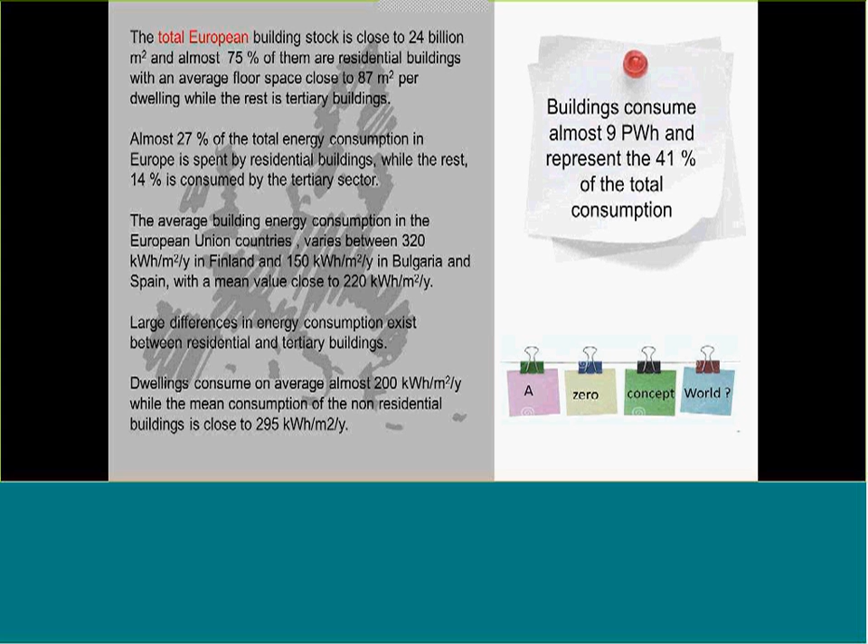As it concerns the evolution of the energy consumption in Europe, the tertiary sector is unfortunately presenting a continuous increase of the consumption during the last 30 years. The increase rate is of the order of magnitude of 1%, 1.1% per year.

And this is mainly because of the very rapid increase and evolution of the services sector in the tertiary buildings, and especially this evolution of the services sector is of the order of magnitude 1.5, 1.3% per year. And it is calculated that about 93% of the additional energy to be consumed in the tertiary buildings is because of the services sector.

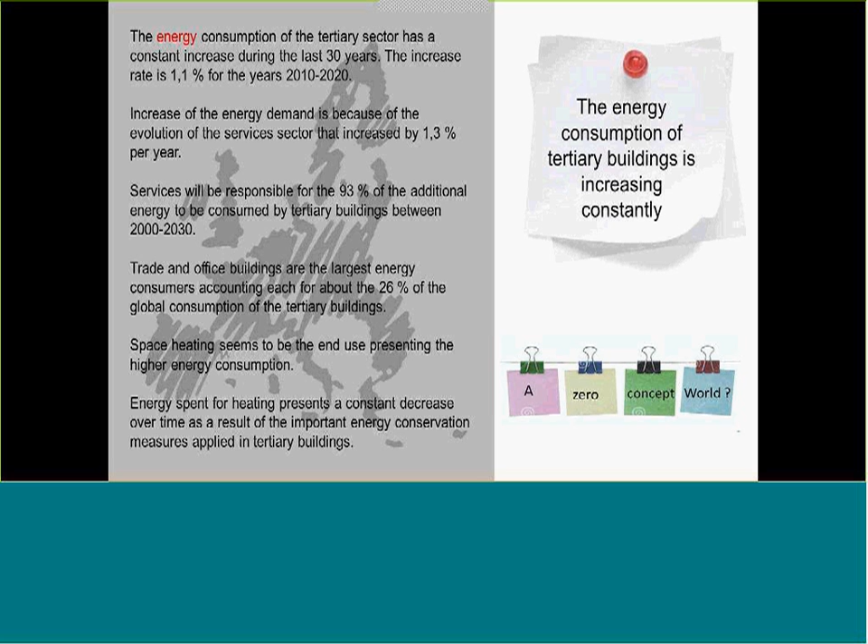And space heating seems to be the more important of the energy consumption components, but we have to accept that the energy consumption for space heating is decreasing during the very last years.

As it concerns the residential sector, and despite the very important legislative framework that has been developed during the very last years, and the significant improvement of the energy efficiency, which is of the order of magnitude of 1.4% per year, unfortunately, the energy consumption of the residential sector in Europe has increased by 14% between 1990 and 2012. And this is because 60% of the increase is due to the increase of the electricity consumption because of the additional use of air conditioning, cooling, electronic appliances and devices.

And also we have to consider, and it is very important, that the increase of the energy consumption in the residential sector is not only a technical problem, but is very strongly interrelated with other economic, social, political, and technical reasons, which really are very much associated with the final energy consumption. I will go through that and explain to you.

On the other hand, although the energy consumption for the residential buildings and the tertiary buildings has unfortunately increased during the very last years, we have a very specific decrease of the heating energy consumption of about 15% during the period 1997 to 2009. And this is because we have a very significant legislative framework, but also we have new technologies that help to decrease the energy consumption for heating purposes, and also new dwellings really present much lower energy consumption than in the previous years.

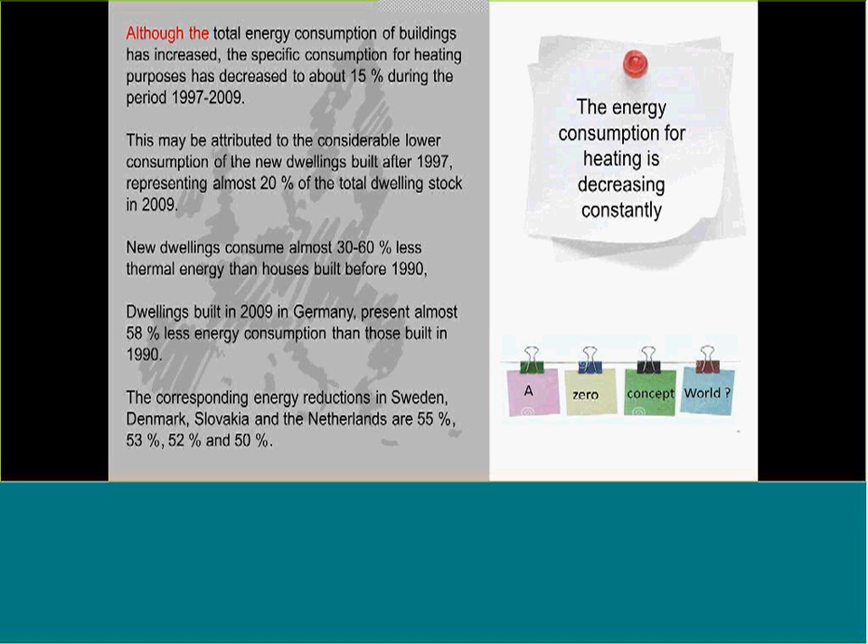And in most of the countries where heating is the major energy consumption component, the energy consumption for heating purposes has been decreased by 50 or 60%. So we might say that we are very successful as it concerns the heating energy consumption.

Also, we know very well in Europe that space heating is the most energy-consuming component for the building sector, representing almost 71% of the total consumption. The second one is water heating, 12%, cooking 4%, while unfortunately the data we have combines lighting, air conditioning, and other appliances together, so we don't have specific information about the energy consumption of air conditioning, nor can we calculate it. Altogether, lighting, air conditioning, and appliances represent almost 15%.

Although this 15% may be considered as low, in reality the energy consumption for cooling is increasing very, very rapidly. Especially in the southern European countries, this energy consumption for cooling purposes is considerably high. For example, in Cyprus it is something close to 670 kilowatt hours per year, while Malta is close to 540 kilowatt hours per year. And although we have very important increasing rates in most of the southern European countries, similar results are also given from the northern European countries, where there is also a very rapid penetration of air conditioning.

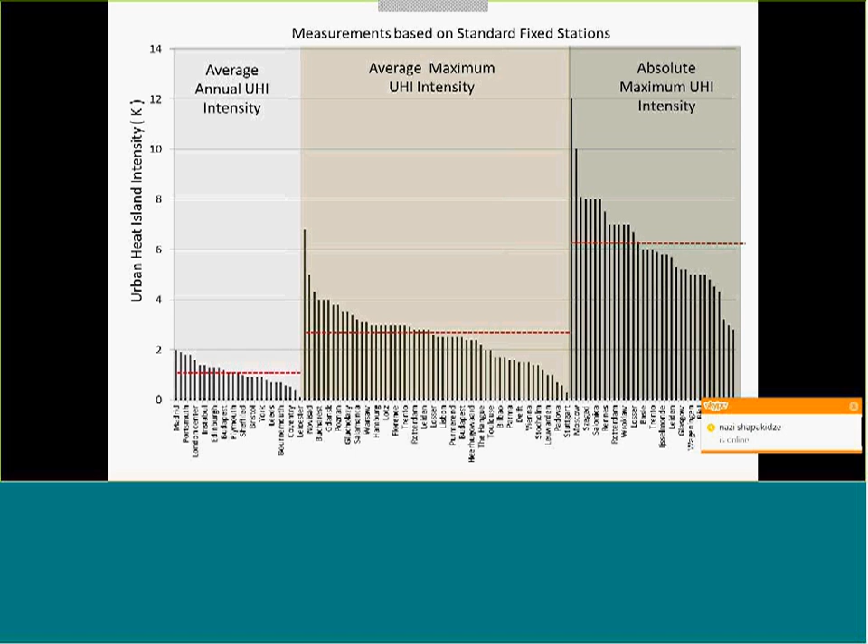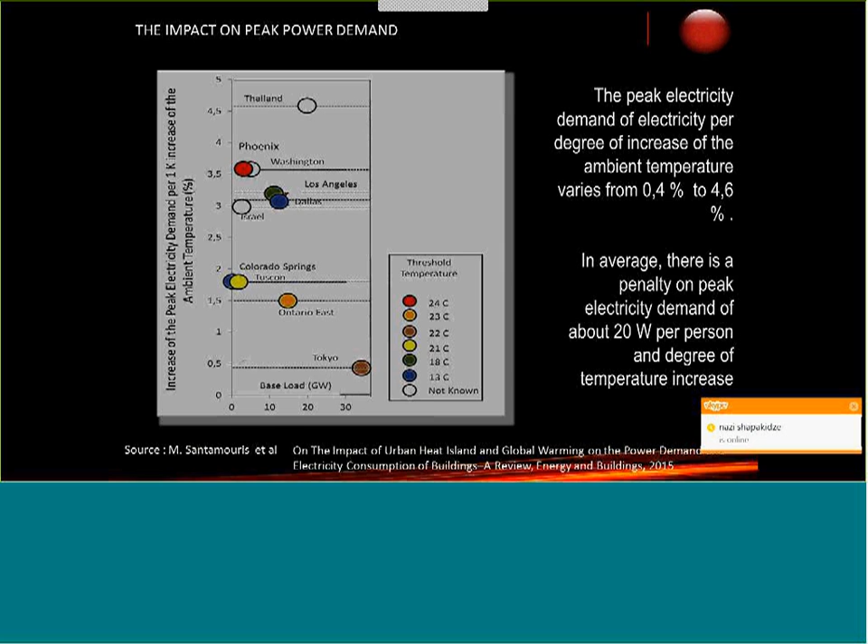This is the more documented phenomenon of climatic change, and this has a very important impact on energy consumption. Recently there is a lot of information trying to assess the energy penalty or cooling penalty because of climatic change. We have seen that the peak electricity demand is increasing between 0.4% to 4.6% per degree of temperature increase. On average, the penalty of peak electricity demand for cooling is about 20 watts per person and degree of temperature increase, which is a huge increase in energy consumption because of climatic change.

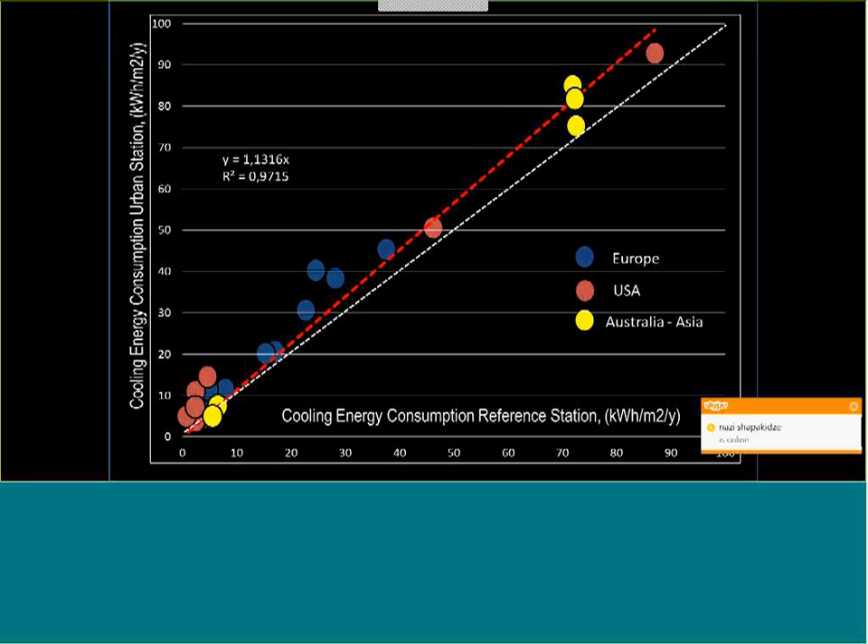On the other hand, very recent publications have shown that the cooling energy consumption in the center of cities all around Europe is increasing by about 13% on average. In some cases we may have a much higher energy penalty or cooling penalty because of the temperature increase. Other studies have shown that the global energy penalty per unit of city surface and per degree of local climatic change is of the order of magnitude of about 0.8 kilowatt-hours per square meter and degree of temperature increase, which is very high, while the penalty per person is of the order of magnitude of 68 kilowatt-hours per person and degree.

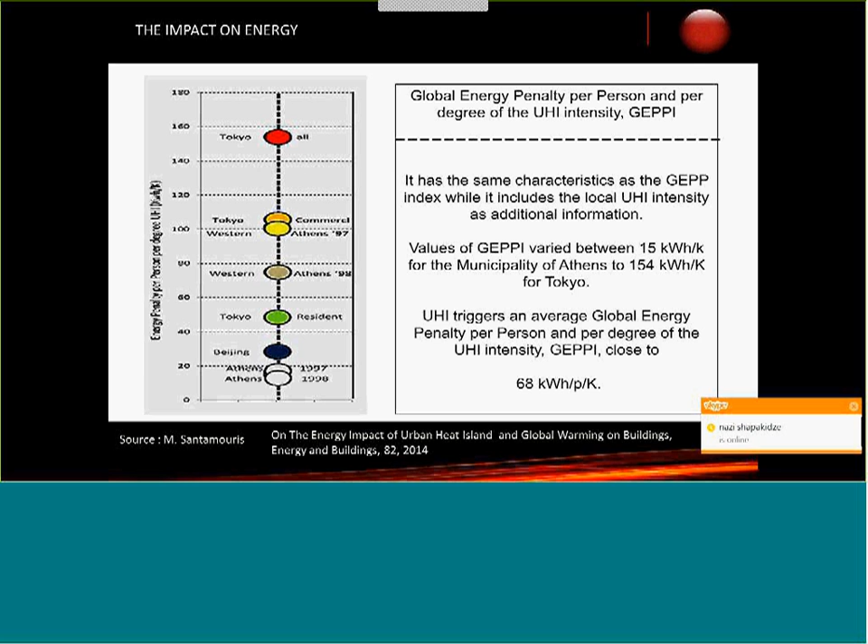So one of the major reasons that increases energy consumption for cooling in our countries has to do with local climatic change. When we examine future climatic scenarios, it is evident that if proper actions are not taken to reduce global climatic change, we expect, according to the IPCC, that energy consumption for cooling will increase by the order of magnitude of 800 to 1,000% during the next 50 to 100 years. We hope not to have such a scenario.

On the other hand, it has to be very clear that cooling is very much associated with health problems. According to a very recent European study carried out in about 30 different cities around the continent, it has shown that the mortality rate in southern European countries is increasing almost exponentially above 30 degrees. For northern European countries, the increase of mortality occurs at temperatures above 23 degrees. This is very important and has a tremendous cost on the health systems of our countries.

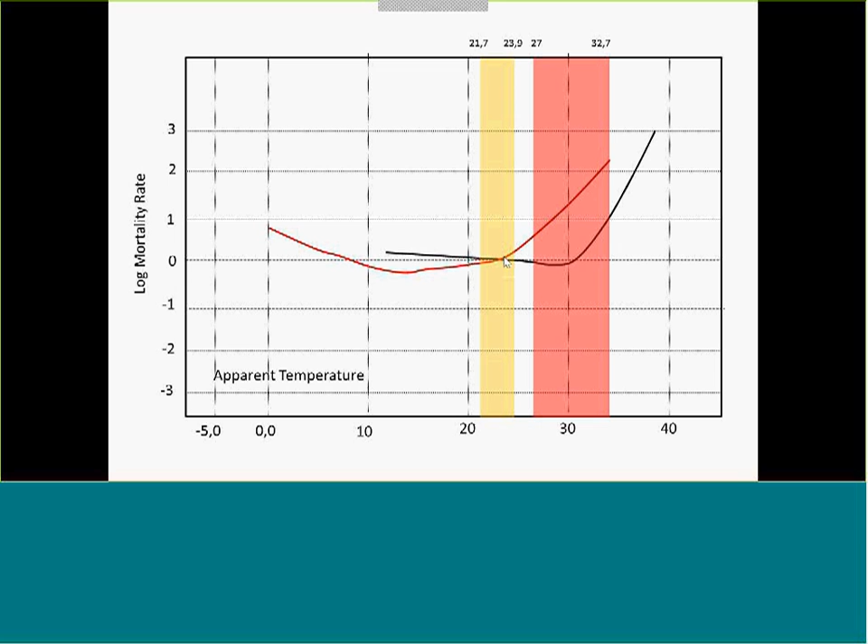A very recent study by the British health system has shown that for every euro invested in energy retrofitting for cooling purposes, almost 40% of this investment returns back because of the health benefits.

The third problem we are facing is very much associated with overheating of our buildings, and also of cooling—it has to do with the so-called energy poverty, which is a very important threat for Europe. Many people never worked on this, or are not aware of the real problem. They don't know that officially in Europe we have 150 million Europeans who are not able to pay bills.

This means 150 million people cannot really face the problem of energy during winter, or mainly during the summer period in the south, maintaining comfortable standards. This has a tremendous impact on quality of life and affects indoor comfort, social entertainment, health, etc. Monitoring of indoor comfort during heat waves in different European countries, especially for energy poor people, has shown that indoor temperature may be more than 35 average, maybe 35, 36 degrees or even more, with spells of more than 400 continuous hours above 32, 33 degrees.

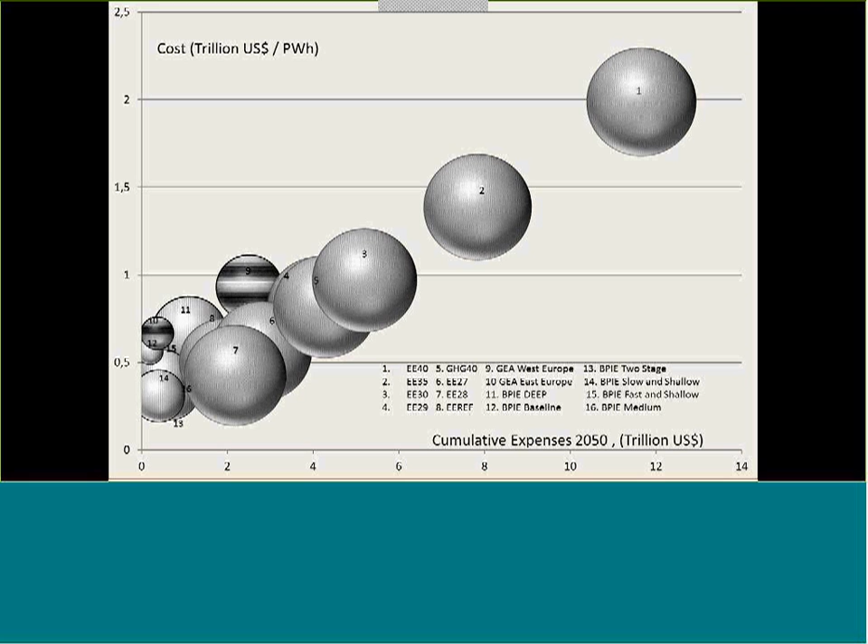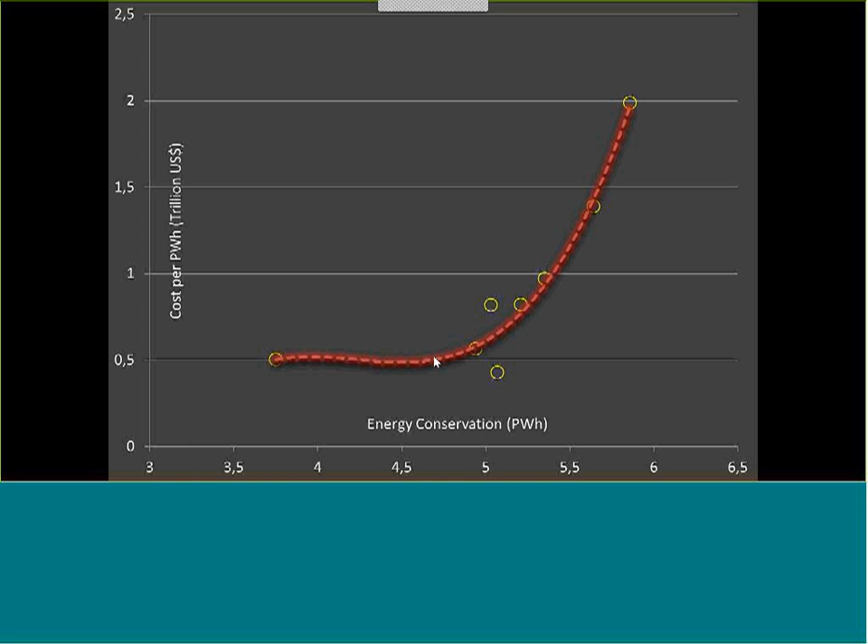What is more important, and must be well understood, is that the cost of energy conservation is not the same—it has almost an exponential figure and shape. For some technologies, the cost per petawatt hour is quite low, and these are the mature technologies, while if we want to decrease energy consumption up to 70 or 75%, as foreseen by the European Union, the cost of the technologies at the upper part of the curve becomes extremely high. We have to understand that cooling technologies are in the lower part of this curve, and this is the very helpful part of the whole situation.

How can we really decrease the energy consumption for cooling in our buildings? Of course, we have to increase the global energy efficiency of the building energy systems. Second, we have to substitute part of the load through clean and renewable energy technologies. But most important is the management of the energy and environmental systems of the buildings through the use of smart and intelligent technologies.

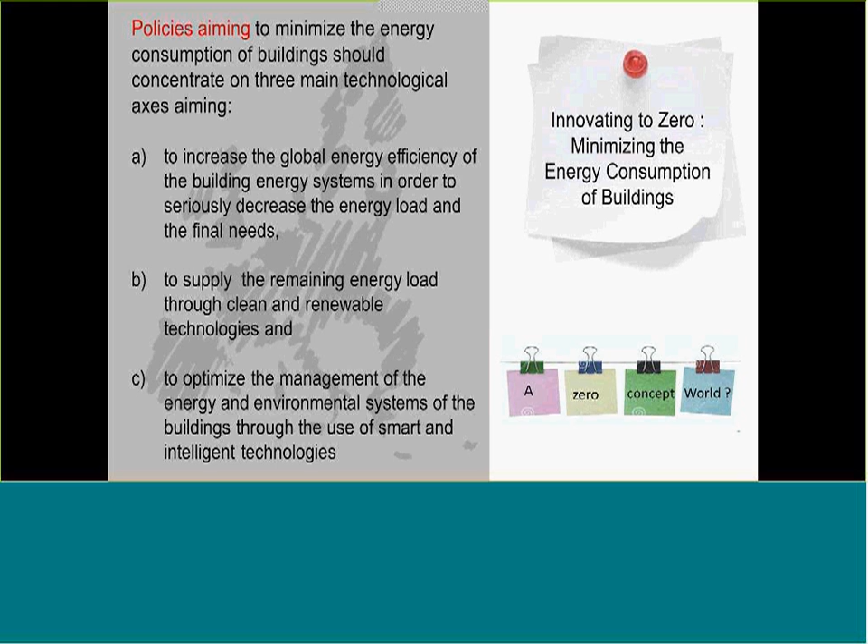Especially the use of smart products in the envelope—for example, natural and hybrid ventilation components, cool coatings—are extremely attractive. Also the use of high-performance heating, ventilation, and air conditioning systems is a huge market, with tremendous research. The order of magnitude of the market is close to 162 billion euros per year, and presents a growing rate in Europe of the order of magnitude of 10.5% per year.

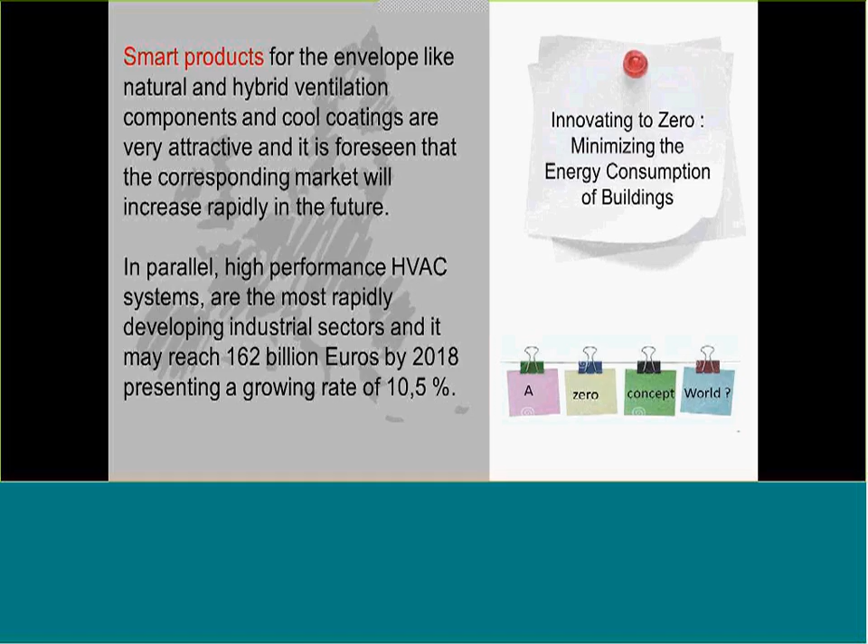On the other hand, if we really like to decrease the impact of global and local climatic change, we have to adopt mitigation technologies. These are very much associated with the use of component technologies for the roofs, for the city, etc. There's a recent study that has evaluated the total investment per person needed to minimize local climatic change in Europe, in order to avoid the temperature increase.

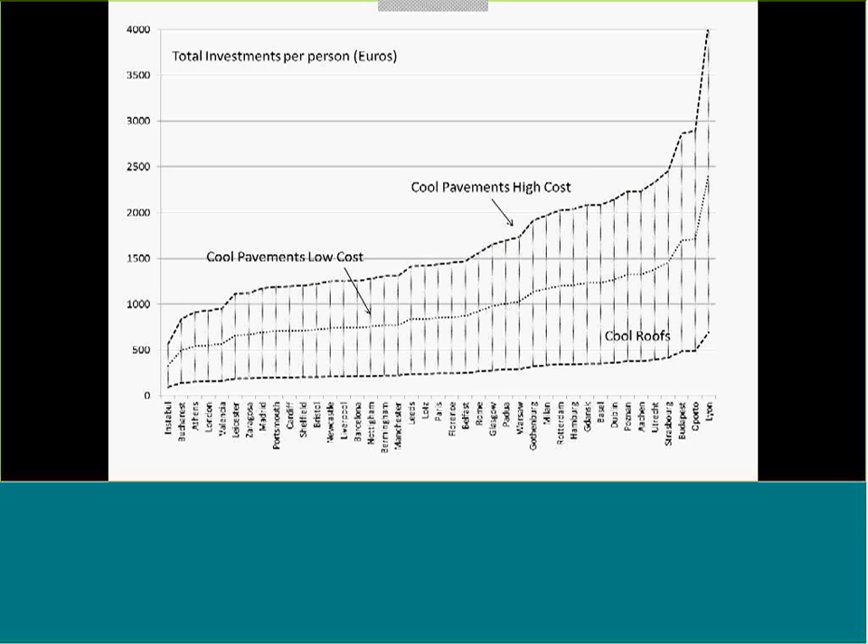For the different cities of Europe, the investment that has to be spent, the maximum to avoid the problem, is no more than 4,000 euros per person absolute maximum, while the average cost is of the order of about 1,000 euros per person. So by investing 1,000 euros per person in our cities, we can really mitigate the problem of local climatic change and avoid the problem of overheating.

On the other hand, in order to offer additional comfort to the 150 million energy poor in Europe, and avoid increased mortality and deteriorated comfort, recent studies have calculated the cost that has to be paid in Europe to retrofit all buildings of the energy poor. The absolute maximum cost is no more than 2.5 trillion by 2050, while the average is about 1 trillion. So this is the cost if we really like to improve the energy efficiency of our buildings.

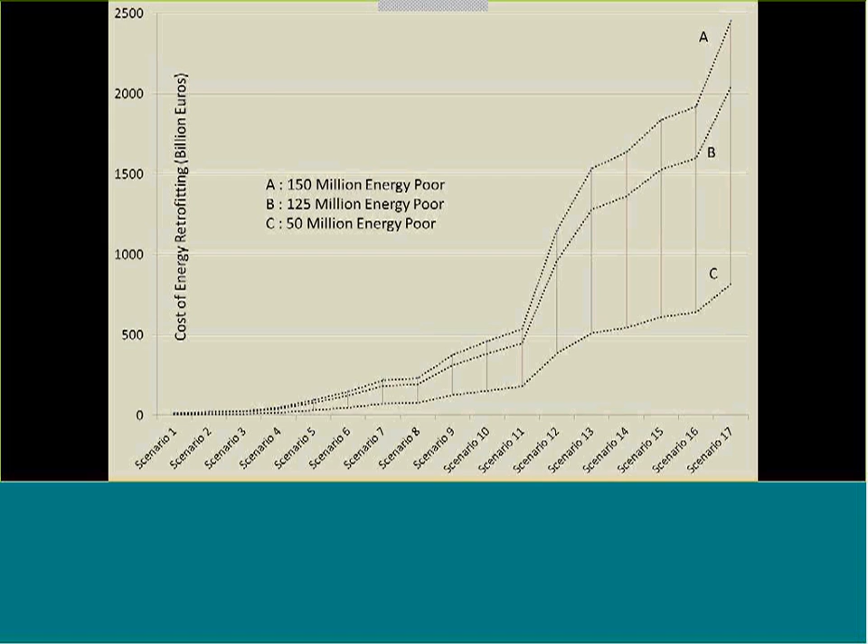I'd like to conclude by saying that the high energy consumption of the building sector, in combination with local climatic change and energy poverty, are really the major problems of the built environment in Europe.

Everyone knows very well that cooling is increasing very rapidly, and perhaps in the future, according to all foresights and projections, it is going to be the major consumption component.

We have to understand, and this is very important, that the problem of energy consumption in the building sector is not just a technical problem, not just a matter of technology to decrease energy consumption. All three sectors, especially energy consumption, local climatic change, and energy poverty, have to be considered in a holistic way. Because they are so interrelated, with so many significant synergies and trade-offs, the problem has to be considered completely in a holistic and integrated way.

It is true that the existing policies in the European Union, as is now understood and addressed in most EU papers aiming to reduce the energy consumption of buildings, usually underestimate the importance and impact of climatic change, and also the technical, social, and economic implications of energy poverty. During the last years, the Commission has started to address the three issues together. But if we continue not to consider all issues in an integrated and holistic way, this will result in higher energy consumption for cooling and in social discrepancies.